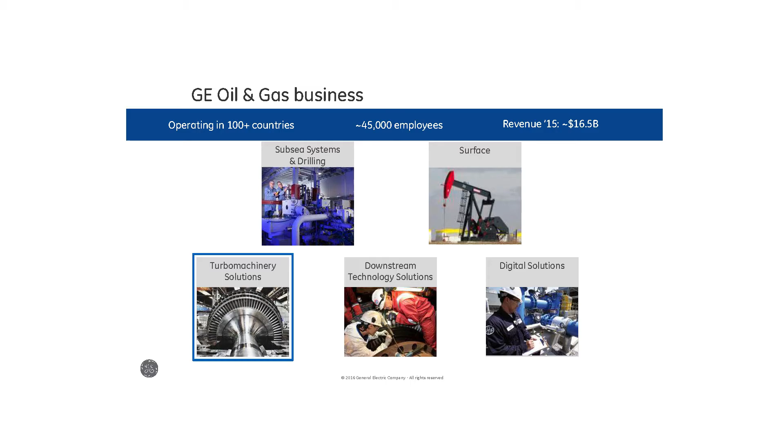Our business, gas processing, sits within the turbo machinery group within GE Oil and Gas. GE Oil and Gas is about $15 to $20 billion business. As you might have heard, we're now merging that with Baker Hughes, so by the middle of this year there'll be a new company created. Probably the structure will change somewhat, but our turbo machinery business is where all of our big gas, aero-derivative gas turbines, heavy-duty frames come out of, as well as a lot of our other rotating equipment and compressor solutions. The core of our business is in Italy and quite a lot around the world.

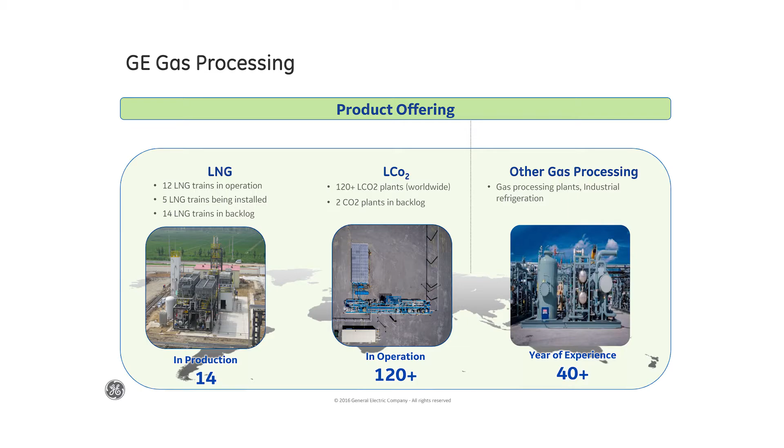In terms of GE gas processing, we encompass 3 different product lines. The core of our expertise is around industrial refrigeration, and within that there's three segments I'll talk about. The LNG segment, we have a small-scale LNG business that goes up to mid-scale. We've got a CO2 business, which is really the legacy core of this company, where we developed our expertise on doing refrigeration and modularized designs for plants. And then the other part of our business is around gas processing, not the more commoditized gas processing segment where Exterran and Enerflex dominate, but more niche applications and other types of industrial refrigeration, like ethane chillers, ethylene projects, and other things that leverage our expertise. The core of what we do is a modularized design versus a field-directed stick-built design. There's some variation in terms of what modularity means, but that's really the expertise of our business.

We've got, as I mentioned, most of our experience built in CO2. We've leveraged that as the small-scale LNG market and mid-scale has developed, growing into that space.

In terms of the markets we focus on, there's two I'm going to focus on for LNG in the next few slides. The drivers for the other markets, CO2 and gas processing, are completely different, but for this discussion I'll focus on LNG. There's two main markets: domestic and export. On the domestic side, you've got the high horsepower market, which is really a diesel displacement arbitrage game, a very small market today. There aren't a lot of opportunities for diesel displacement given the price of oil, but that would be rail, mining, some long-haul trucking, and other small pilot projects. The other domestic market with more opportunity is marine, which has been discussed, and gas to power—nothing to do with diesel price necessarily, but there are a lot of smaller plants in the Caribbean, Africa, and around the world that need gas, can't get it, so small-scale LNG is an opportunity to fill that need. The other market we focus on is the export sector.

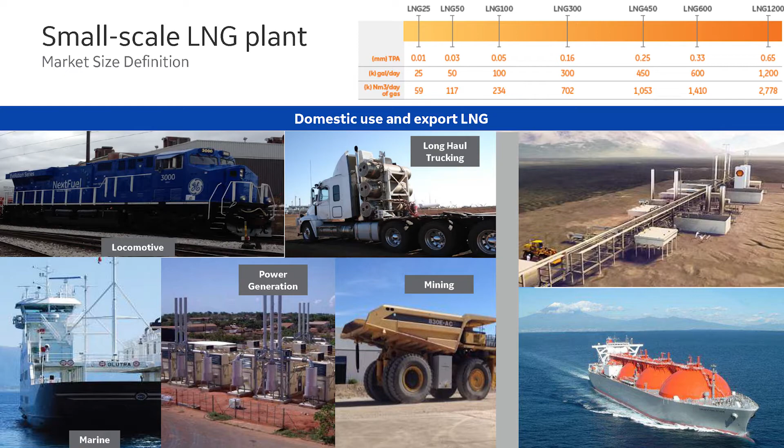Within big GE, we've been supplying the big compression trains for LNG plants, ConocoPhillips, APCI, for decades. What we're seeing today is a change in the business model for some of these plants, and a convergence between a lot of the modularity, expertise, and different processes in the small scale, combined with the larger scale to create this mid-scale space.

Getting into what our typical solutions are, just to be clear, we're not an EPC. What you see there is a small-scale LNG train. This one in particular was built for Shell, the first one we did for them. It's sitting on a back pad outside our facility near San Antonio, where we did a factory acceptance test. This train is 450,000 gallons a day, or 0.25 MTPA.

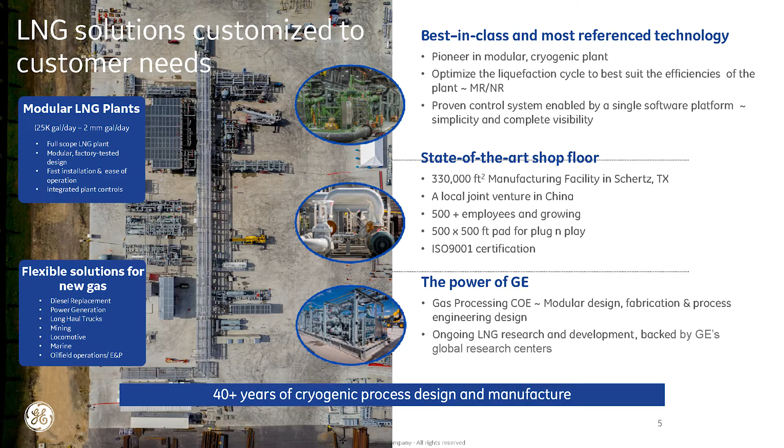Our typical scope within an LNG train encompasses the pretreatment side, taking the gas coming in and cleaning it up to take out water, CO2, H2S, and other contaminants like BTEX that would freeze up in the cold box, and then liquefying it. On the bottom side is the cold side, and the warm side of the plant. On the upper end, on the left, are the air coolers, and on the right, the two compression trains, where the liquefaction takes place. That's pretty typical for a small-scale plant, though this is just one configuration we have.

Now, the way we approach these projects, we have structured product designs that we use. I wouldn't use the word standard, because there is no such thing as a standard LNG plant. Everything has to be customized to some degree, but we try to have a structured design we can leverage for each project. Each project has its own specific variables that we analyze and match with a process design. We have our own liquefaction processes, from single-cycle nitrogen, methane, single-cycle mixed refrigerant, to a pre-cooled cycle. So we match those project variables with the process for that particular project, and then decide what the right equipment selections are going to be to create a safe and efficient solution.

We've got a facility outside of San Antonio where we build these kinds of modules. You can't see them very well here, but these are truck-sized modules that fit in the back of trucks. This facility serves not just LNG, but also our CO2 plants and other industrial solutions. The modules we do for truck size, some of the modules for CO2 plants, are really just skidded equipment.

For this plant, Shell has a lot of very specific requirements, as many of you may be aware, unique to Shell. So there's a lot more design that goes into this train than for some of our smaller facilities, which tend to be more CapEx sensitive, where we try to take out some of the bells and whistles.

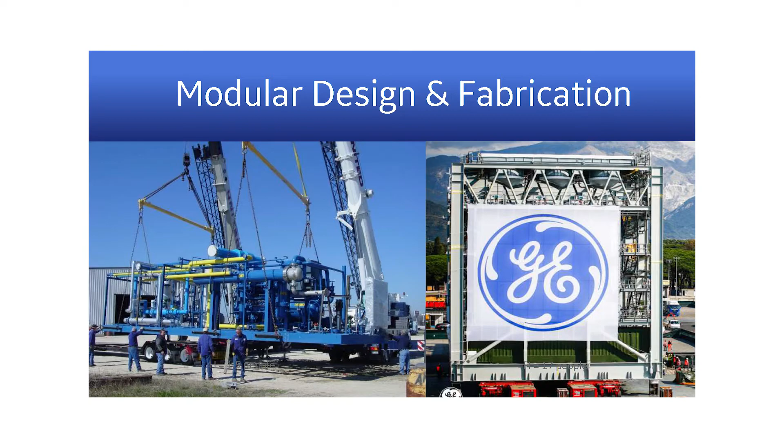So, modular design. What you see on the left is an example of one of the skids we did for a CO2 plant. Pretty typical, for one CO2 plant, total CapEx might be $20 million. These are pretty small, might have 4 or 5 skids, an electrical control room, and some storage and offloading. Pretty simple. On the right, this is a big mega module.

With our LNG markets today, we've leveraged experience from doing large mega modules for power gen, and brought that into the LNG space for mid-scale. We've seen demand for these export plants looking for different business models where they can take out some of the variables in their project that are driving up cost.

So the benefits of modularity, when you think about it, the reasons clients choose a modular design is to help control their labor costs. In many places in the world, labor is constrained or expensive. We take a lot of this field work and bring it into a factory environment, where you get higher productivity. We have the same labor force, same welders doing this work on a repetitive basis. You're in a factory-controlled environment, so that generally benefits the safety of the project as well as the schedule.

You're not at the whims of the weather and so forth. At the same time, as we're doing the modular design in our factory, the EPC can be preparing the site, laying foundations, and optimizing their schedule to minimize the amount of equipment they have on site. They'll know when the modules are coming, and can arrange when they need craneage. So it helps bring the overall project schedule and the cost down.

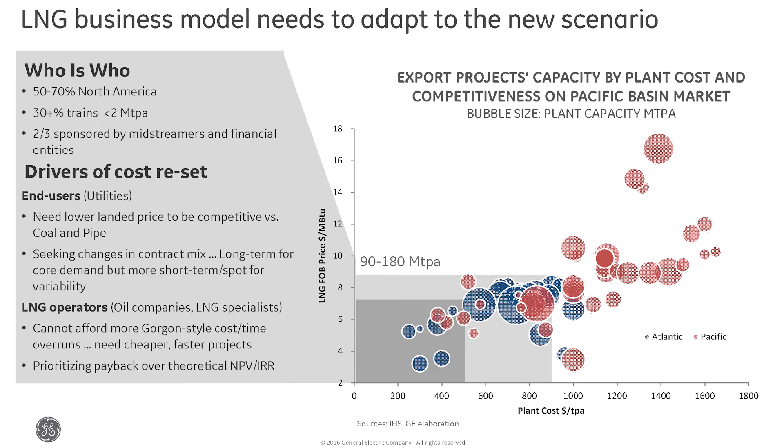So we've talked a lot about this today. The last couple of slides I have are just on our view of the market, and I won't beat a dead horse here, but I think this complements what Tyler was saying, what Blake was saying. If you look at that chart on the right-hand side, all those bubbles are LNG projects, and there's a significant cost reset going on today because of the oversupply of LNG.

You can't do these large projects with huge cost overruns. So you have a lot of projects that are trying to develop new business models, and they're moving down into that kind of gray rectangle area. The plant costs have to come down. You see everyone talking about dollars per ton and getting it much lower than it's been historically, much far under $1,000, not even $1,000 a ton.

People are talking at $500 a ton or less in some cases. None of those projects have realized that yet. These are concepts and new business models, but it's a significant disruption to the industry. A lot of these projects are in North America, but we are seeing a lot of opportunities, a lot of clients that we're talking to in other locations as well, that are looking at more of a mid-scale model.

So what does mid-scale mean? We've all got different definitions. There's nothing standard about what mid-scale means, but for us, the way we see this is a convergence between taking the small-scale LNG mentality for a project and combining that to produce a large export facility. So these are generally still big facilities. Venture Global, for example, working with them, they're looking at a 10 MTPA facility. That's a big baseload facility, but they're doing it with 18 trains that are about 0.5, 0.6 MTPA each.

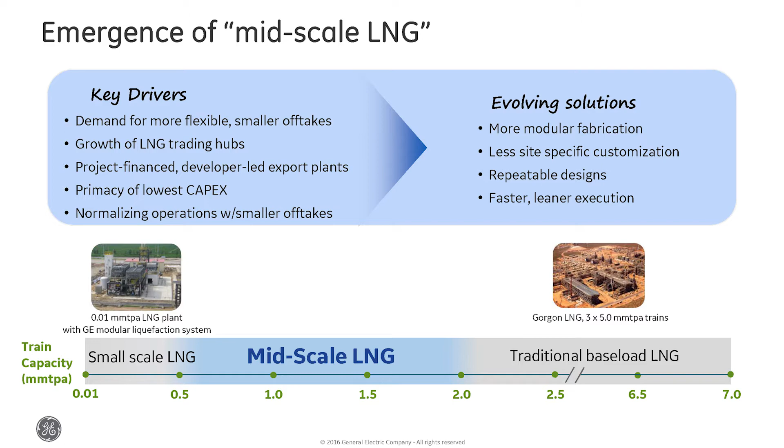So some of the solutions, as I mentioned, these new developers are looking at more modularized solutions, less site-specific construction. They're looking at simpler equipment, more standard vessels and so forth, brazed aluminum heat exchangers instead of these very massively expensive spiral-wound heat exchangers. They don't need 10 different cascades and pre-cooling cycles, just simple cycle, mixed refrigerant. If the thermal efficiency is within 10% of one of the big cycles, it's good enough. That's the mentality. And then, as Blake was saying, the faster, leaner execution. So hopefully that didn't go too long, but in a nutshell, that's kind of where we see things going.

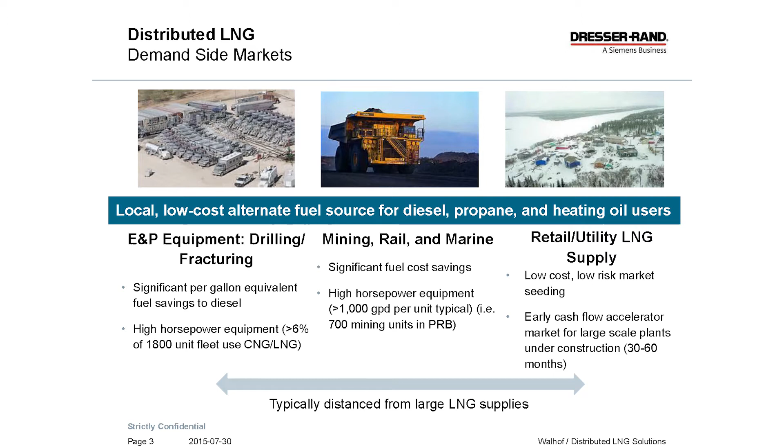So distributed LNG demand side markets - where we see our demand is going to be in small consumers, could be mine trucks, could be remote utilities, northern Canada, the Caribbean, these places. They have power generation, but it's not a lot, so you don't need a lot of gas. So we see those as our demand side markets.

CNG doesn't particularly work for a mining truck. You can't get enough BTUs on the truck. So LNG kind of fits in the mining space a little bit there.

On the supply side, we get inquiries from flaring, like in the Bakken - can we liquefy that gas? Because they don't want to put in the pipeline infrastructure potentially. Or in the Marcellus, there's a lot of capped wells. Maybe they want to bring that gas to market, even create it on their own by putting in remote power generation somewhere in a small remote village and then bring it up from the Marcellus. So those are some of the things we kind of get into.

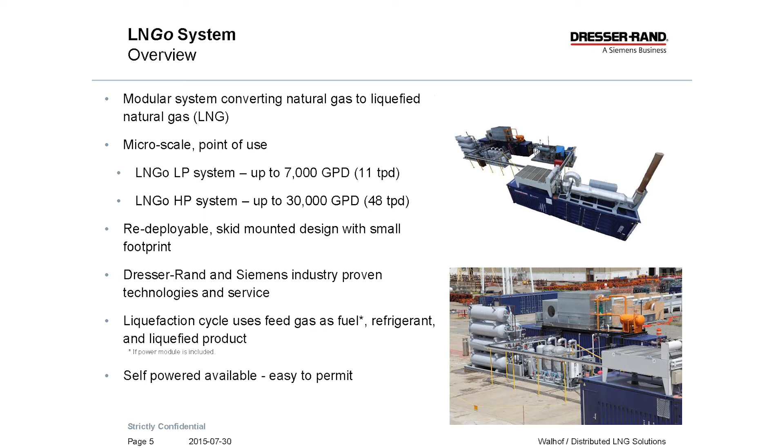This is our low pressure system. It makes about 7,000 gallons in the pictures there, which is 11 tons per day. So it's redeployable - you do have to put in some foundations, but it is redeployable. You can pick it up and move it.

We also have an HP system, which we'll get to. Makes about 48 tons per day. Throughout this system is Dresser-Rand compression, Siemens technology as far as motors and drives. And basically, we use the client's gas as the refrigerant cycle.

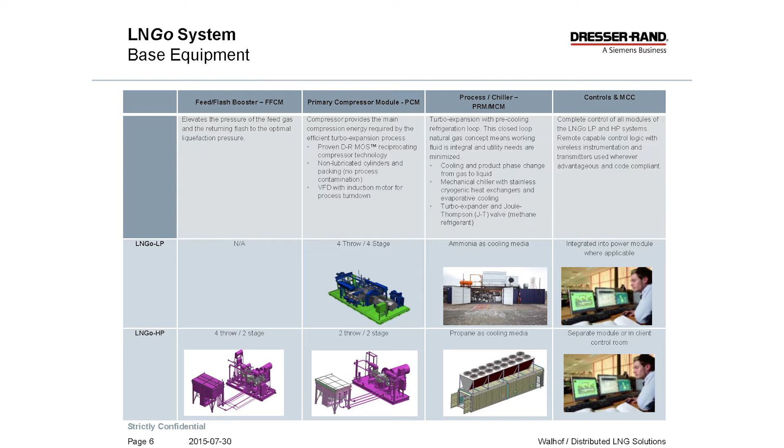It's a pretty complicated slide here, but what you're seeing is the difference between the LP system and the HP system and the equipment that's involved. So the LP has no feed flash compressor. They both have a primary compressor. They both have a process module, turbo expander style plant, and then they both have controls modules.

In addition to that, we do some gas cleanup. We do a temperature swing absorption on the high pressure. We do a pressure swing absorption on the low pressure to clean out the last of the water and CO2, basically - so it's basically a polisher. We provide power modules where we burn the tail from the gas conditioning to make power along with some of the raw gas. And then we can contract LNG storage and balance of plant as well if a developer is interested in that.

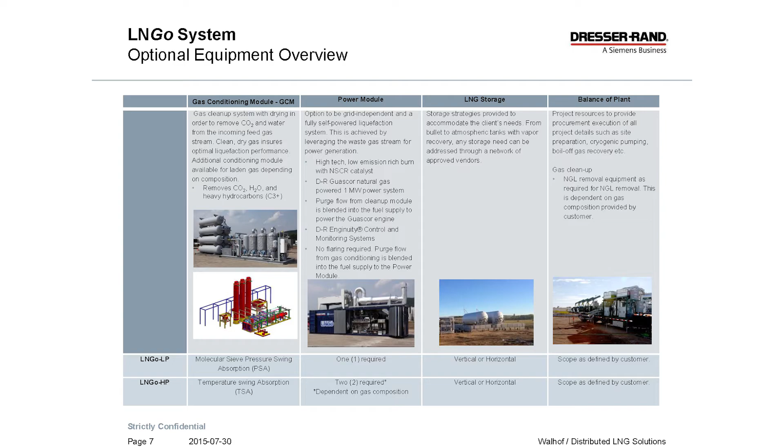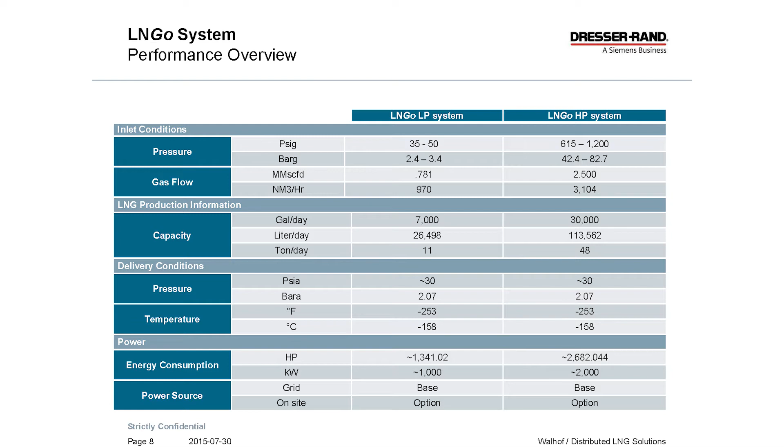Main difference between the LP and the HP is the inlet raw gas pressure. So the LP system takes in 35 psig, which is nice for like a well site - maybe you're running a JT skid. So the advantage for taking in low pressure is there. High pressure side, you're getting thermodynamic advantages - you can put that on a pipeline and take advantages on that side.

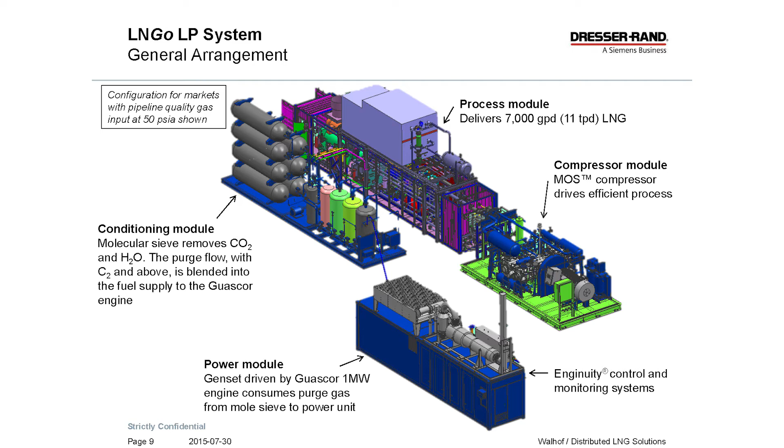Another look at the 4 modules of the LP: conditioning module, power module, compression module, process module. So that's just sort of the solid model there.

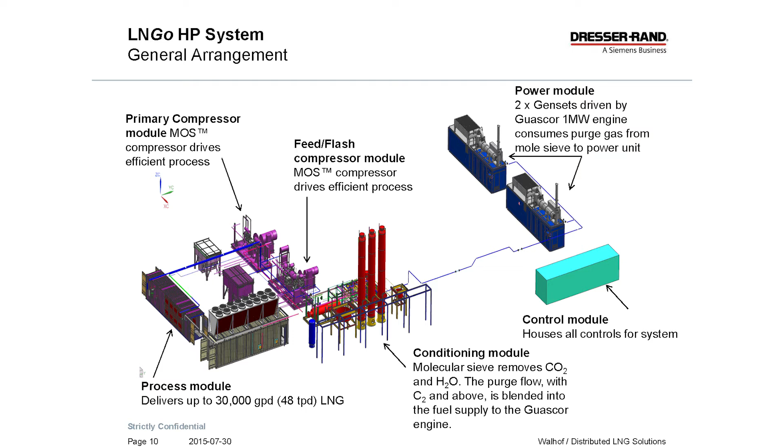This is the solid model of the HP unit, making about 2 megawatts worth of power, treating that gas with the temperature swing adsorber, turbo expander style plant, can produce up to 30,000 gallons.

We're a little bit at the mercy of the gas that the customer wants to liquefy. But as others have stated, we don't modify the process very much. What I do is run simulations and say, hey, if this is your project, this is where we can get you with our equipment, and they take that and run their economics.

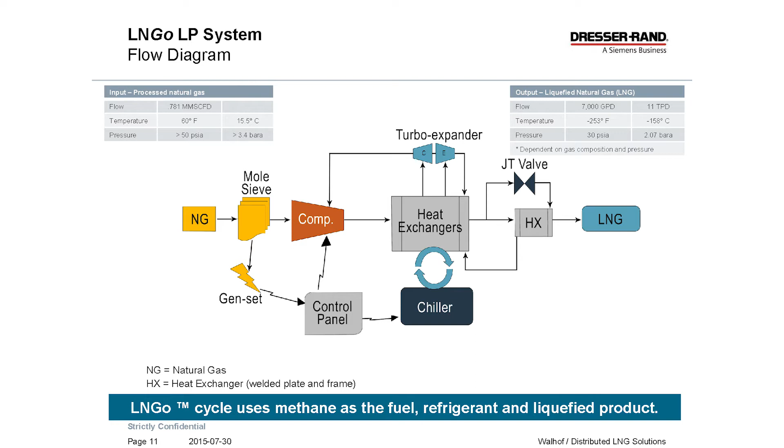This is a PFD of the cycle here for public consumption. So basically compress the gas after we do a little cleanup, turbo expander style plant, goes into a flash vessel. There is a pre-cooler on this loop, so we pre-cool the gas before we expand it, JT valve at the end into the flash, and then we have LNG.

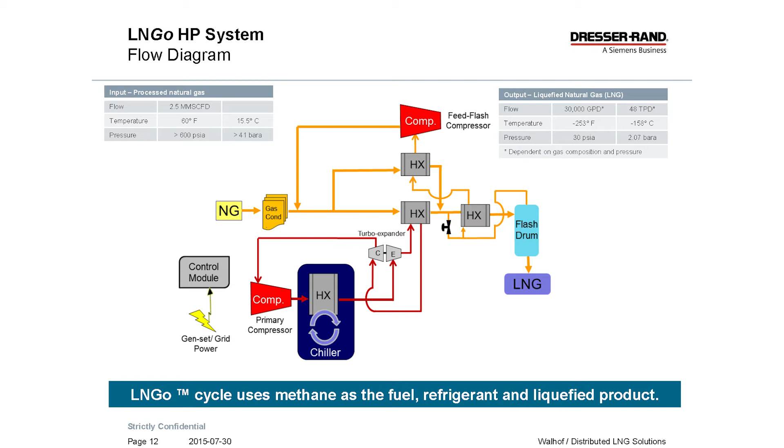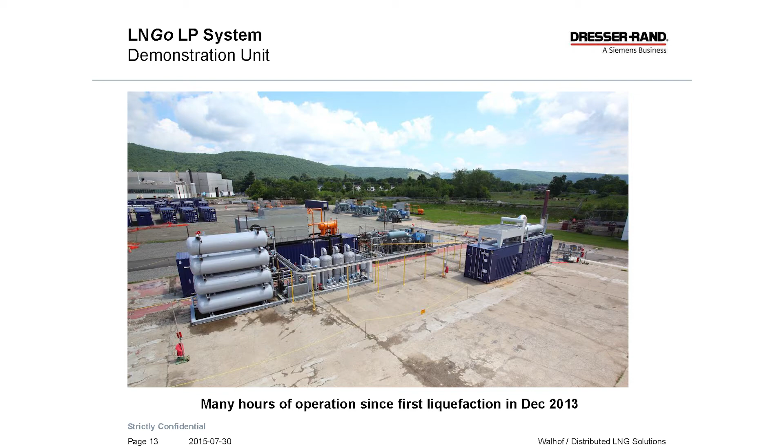This is our demonstration unit in New York. So this is at our facility in Painted Post, New York, which is where Dresser-Rand has a factory, a compressor factory. We put this unit online in 2013 and finished some R&D and then actually moved it to Pennsylvania.

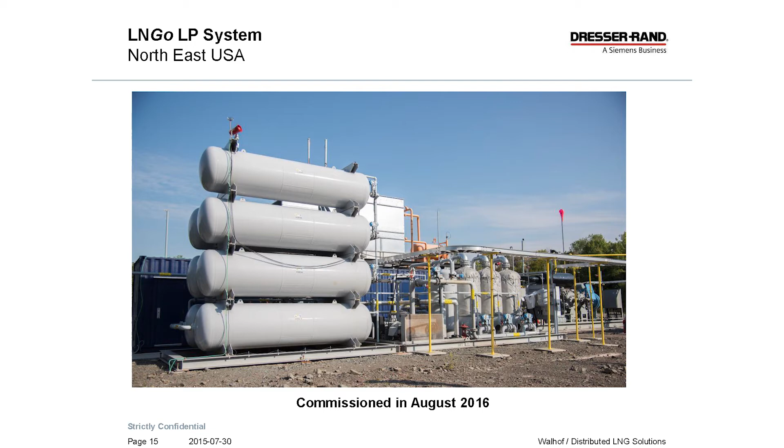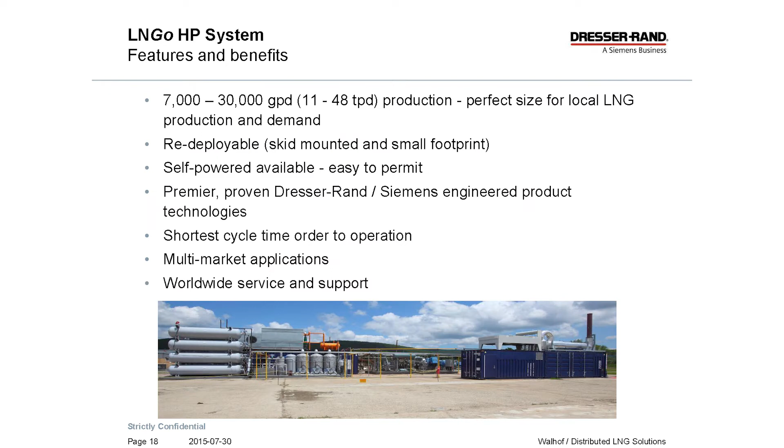Just to kind of wrap it up here for you: these units produce between 7,000 and 30,000 gallons, which is 11 to 48 tons per day. It works well for local LNG production. We've seen demand for IPPs that have interruptible supply, that just want to make LNG as a standby. We see a lot of power generation, I would say, is probably the biggest driver we see right now.

We have the shortest cycle time to operation, multi-market applications, worldwide service and support with Siemens. Inside of this unit is basically all components that were already in play for Dresser-Rand or Siemens.

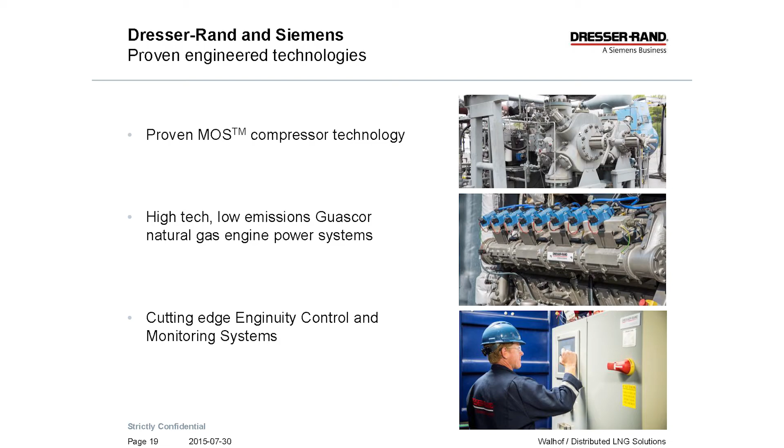The MOS compressor is used in booster stations on gas pipelines and other various applications. The Guascor genset is our engine manufacturer out of Spain, which is used in biogas applications and any other power applications for recip power.